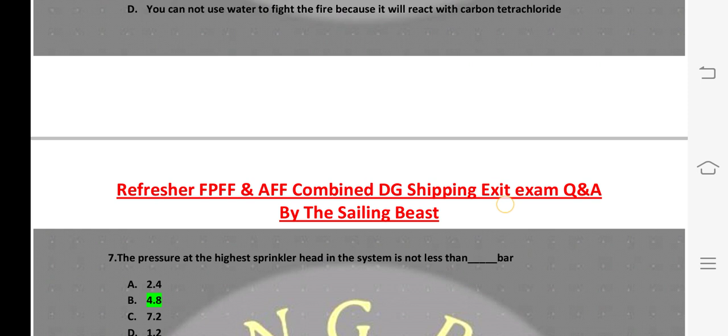Question number 7: If the pressure at highest sprinkler head in the system is not less than dash bar, answer is B, 4.8.

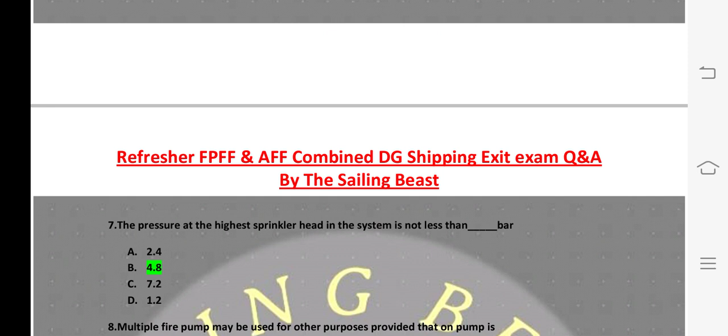Question number 8: Multiple fire pumps may be used for purposes provided that one pump is, answer is B, kept available for use on the firemain at all times.

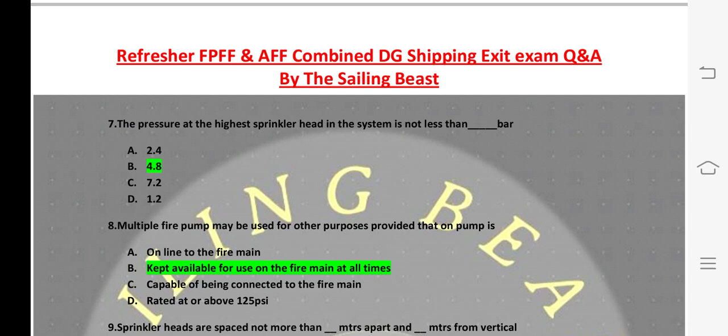Question number 9: Sprinkler heads are spaced not more than dash meters apart and dash meters from vertical. So answer is 4 meters apart and 2 meters from vertical.

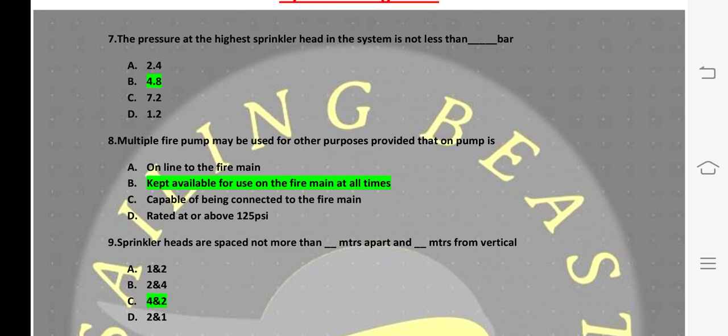Question number 10: How to make static charge of two paint drums equal? So answer is C, keep the one drum onto the other drum.

Question number 11: There must be at least dash power source for seawater pump, alarm system and freshwater pump. So answer is B, 2.

Question number 12: After puncturing the valuable cargo container, what type of extinguishing medium can be used? Answer is D, CO2.

Question number 13: Each sprinkler system consists of independent seawater pump with its own seawater suction. Answer is true.

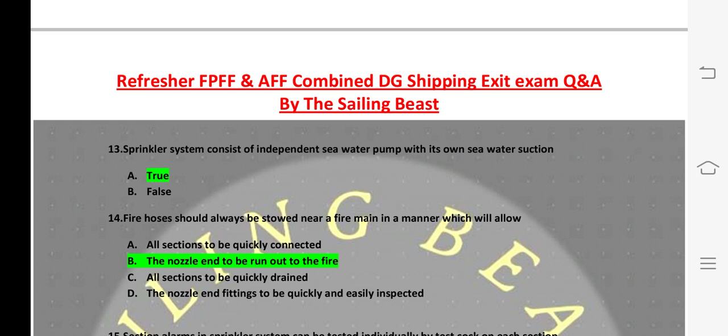Question number 14: Fire hoses should always be stowed near a fire main in a manner which will allow, answer B, the nozzle end to be run out to the fire.

Question number 15: Section alarm in sprinkler system can be tested individually by a test cock in each section. Answer is true.

Question number 16: What is the most vulnerable part of fire main system? Correct answer is D, fire hose.

Question number 17: The operating range of quartzoid bulb in sprinkler system is 68 degrees Celsius to 93 degrees Celsius. Correct answer is true.

Question number 18: When two fire teams are attacking a fire, they should, answer is C, not attack the fire from opposite sides.

Question number 19: Fire hydrant valves on crude oil tankers shall be isolated from crude oil washing system by, answer is A, spade blank.

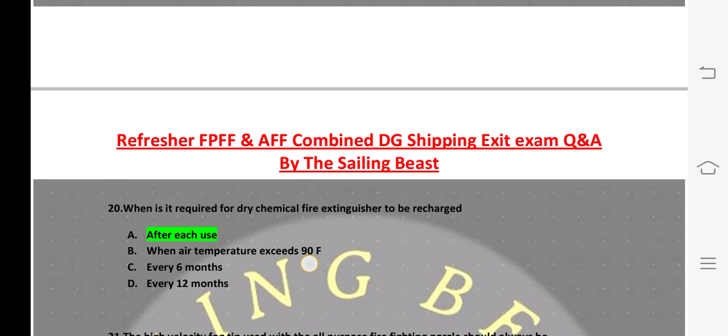Question number 20: When is it required by a dry chemical fire extinguisher to be recharged? Answer is A, after each use.

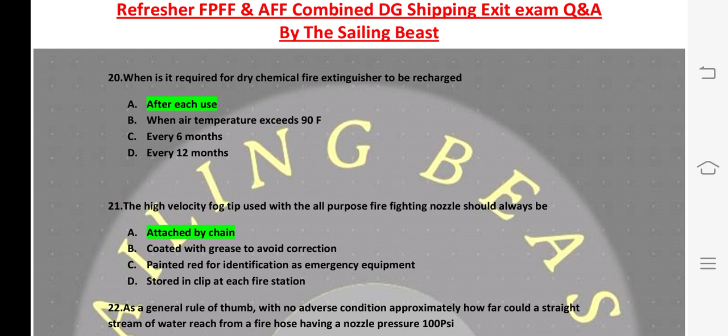Question number 21: The high velocity fog tip used with all purpose firefighting nozzle should always be, answer is A, attached by chain.

Question number 22: As a general rule of thumb, with no adverse condition, approximately how far could a straight stream of water reach from a fire hose having nozzle pressure 100 psi? So answer is B, 100 feet.

Question number 23: A carbon dioxide extinguisher should be recharged. Answer is B, whenever it is 10% below the required weight.

Question number 24: Which of the listed fire extinguisher cannot be easily recharged on board ship? Correct answer is B, CO2.

Question number 25: You find that the pressure cartridge on DCP extinguisher is punctured. You should, answer is A, replace the pressure cartridge and weigh the chemical charge.

Question number 26: When the pilot CO2 cylinder pressure is used to initiate the release of CO2 from a fixed fire extinguishing system containing 4 storage cylinders, what would be the minimum number of pilot cylinders required for this installation? Answer is 2.

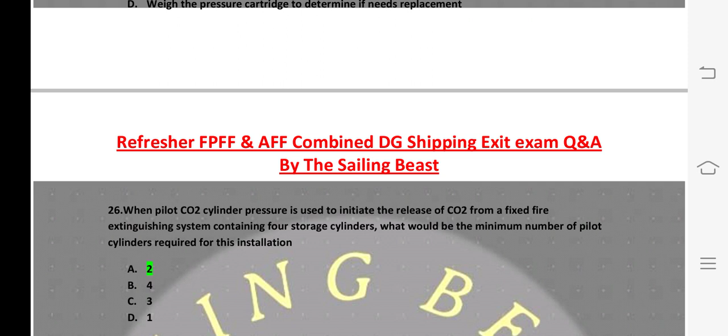Question number 27: When water fog is used as an extinguishing agent, the fire is extinguished principally by, answer is B, absorption of heat.

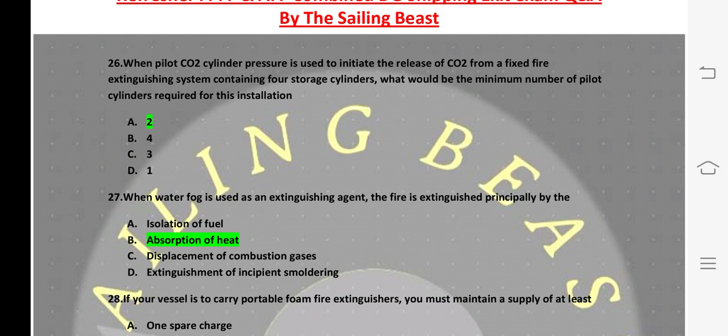Question number 28: If your vessel is to carry portable foam fire extinguisher, you must maintain supply of at least, answer is C, 5 spare charge.